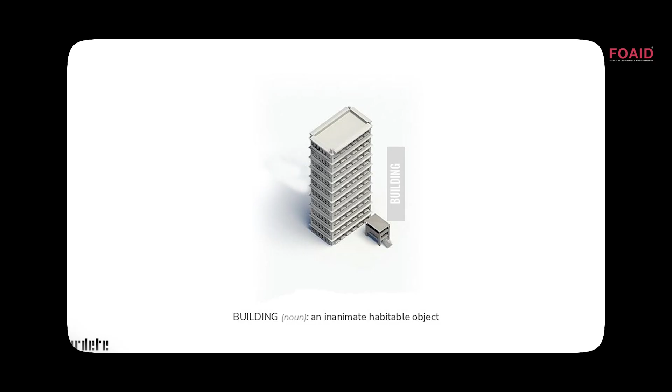So let's say we have a building. Does this building exist like an inanimate, singular object in space? No. We have something we call a site, a two-dimensional space which the building sits onto. But are these the only two that interact with each other?

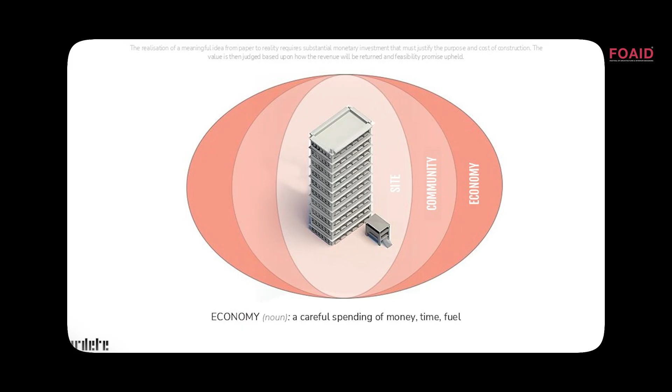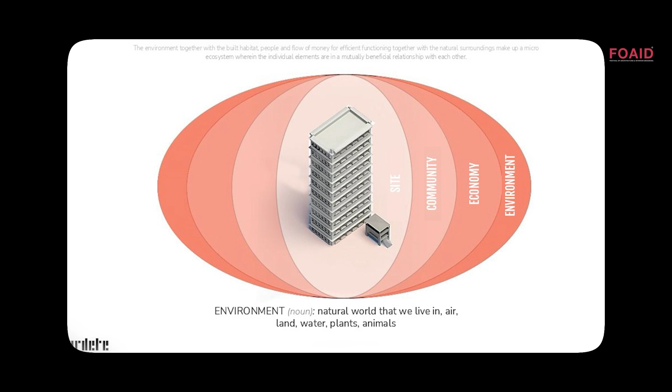We have a community to respond to, because at the end of the day, it's the community that we are building for. And is that the only parameter? It also has to do with economy, because different economies require us to be careful and mindful of what we're supposed to be doing. And then we have environment. So if you look at it, layers keep adding, things keep changing, and many parameters keep coming into it.

And when we say where the confluence actually exists, it exists somewhere in between these spaces - somewhere we have to take care of site, community, building, economy, and environment.

That's something in between. So as a young practice, we started looking at things where we had more challenges in terms of how to address specific problems that probably aren't taught in an architectural text. When we look at it from a perspective of solving problems we haven't thought of before - because when you're doing it from a college level, it's a very different perspective. But real life problems and real life solutions are very different from what we learned in college.

So we call our practice 'Streetsmart Architecture.' What it actually means is that when you're street smart, you have very limited resources and limited time, but you still have to crack the code - something that is very appealing, very fast, and available for everyone. That's what we call street smart architecture.

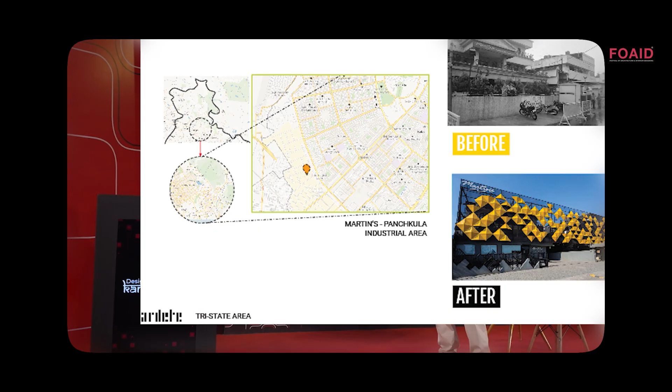When we look at this first project, the top one shows before and after. We built this project about 10 to 12 years ago. It's a pretty old project, but because it was about facades, I thought I would include it. The idea was that this project had two different old industrial buildings, and there was something that needed to be addressed.

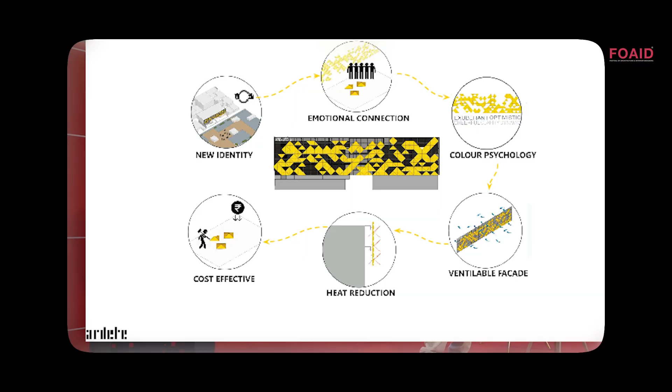So when we were doing it, the question was how do we take a disused industrial building and add a connection. In this particular case, the client asked us to do a screen predominantly in steel and glass, but that wasn't something we wanted to do. We wanted something more vibrant.

It was a north-facing facade, so it didn't hit the sun too hard, so we could be more liberal and flexible with it. So the whole thing turned into a ventilable facade.

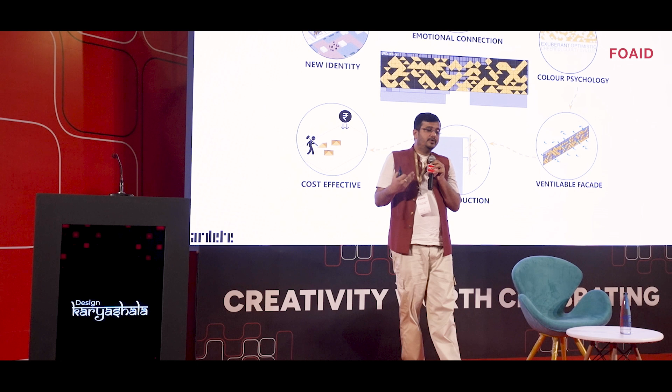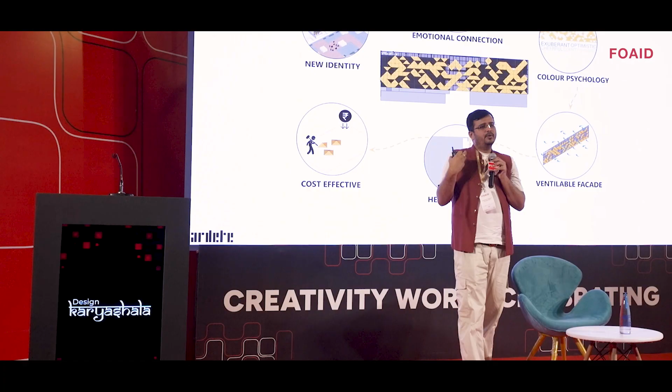Then we looked at how we could reduce the cost even further, so we talked about local methods of making this. We could literally make all the panels within the factory to cut costs instead of bringing them from elsewhere, using a skill that was available and that also connected emotionally to the people working in the factory. This is how it turned out, because it was a very mundane environment we were working in.

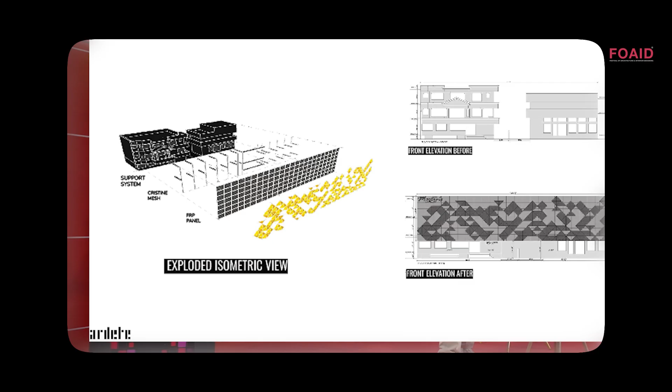So what we did was, it was an existing facade. We wrapped it up with a screen, and then we added these playful elements on top of it. This is how it was being constructed, how it was being made.

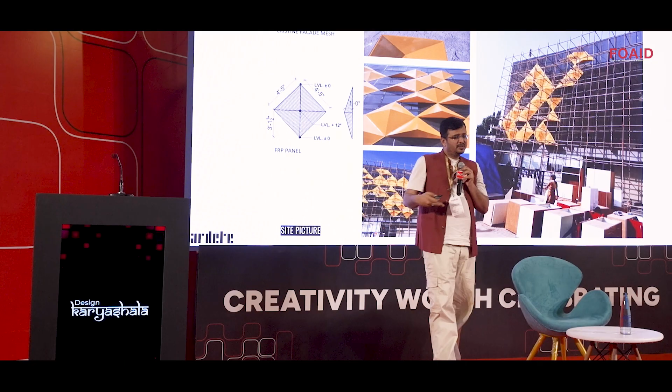There were studies because it was a large plaza, but it was a disused industrial park. So it has a lot of broken parts, a lot of workshops and everything. So it was something we call urban acupuncture, wherein you could have some amount of goodness at some part of it, and it should slowly have a contagious effect to reach other parts. This is how it has come out to be.

This is another project where we were experimenting. When we'd done a certain experiment, we moved on to this one, where we had a similar challenge - very tight spaces where it was already laid out, and we could add something where the client actually said, I want something which would really stand out, show something very promising, and also something that can be timeless.

So when we look at it, we talk about a building where the norms are so stringent that the building volume itself is a zoned area where you can't actually build anything outside it. There's a saying that when densification happens, gardens become terraces, terraces become balconies, and balconies become windows.

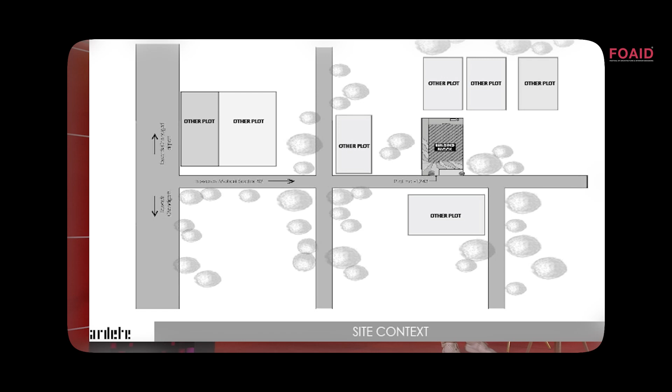Similarly for commercial areas where we talk about forms, massings and elements, end of the day when there's high densification and high real estate cost, it actually comes down to areas where there could be pocketed facades that could still feel like a terrace, and that's how this idea came about for this particular plot.

So here we created a very narrow balcony on a west facade, so we had to reject a lot of west heat. This was in a new area, so we were exploring that, because Chandigarh has been very characteristic of how concrete has been used in innovative ways in its time. So taking inspiration from what Corbusier did with concrete, we tried testing new limits.

We tried to look at thin concrete structures less than 3 inches, with a single reinforcement structure. When we talk about thin concrete structures, it's actually pretty tricky because it needs support and rest, and we're talking about earthquake zone 4. So it is pretty critical.

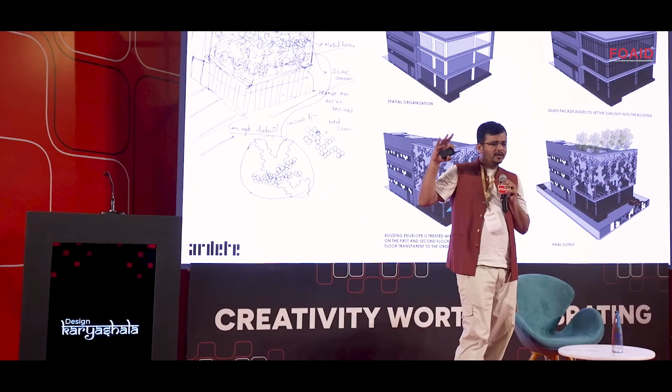So here the interweaving of these particular elements actually holds up the concrete structure as well. The initial idea on the left was something like a cheese tray, or like a honeycomb, where it can gently open up where we wanted and should not open up where we didn't want it. So it was a very subtle, blended movement into it, and then we have a lot of greenery on top.

This is how the construction was made. The interesting part was because we were using standard tools and implements, no specific molds, so it was very difficult for us to even see the facade before it was fully built. We had to wait for different times to see how the pour of concrete was, how it was particularly coming out.

So it was good fun, where we finally ended up doing something pretty meaningful, and this was pretty popular when it was finished - even an institute like IAAC did research on it, on how it could have been made, whether it was AI generated, and this is how it has turned out.

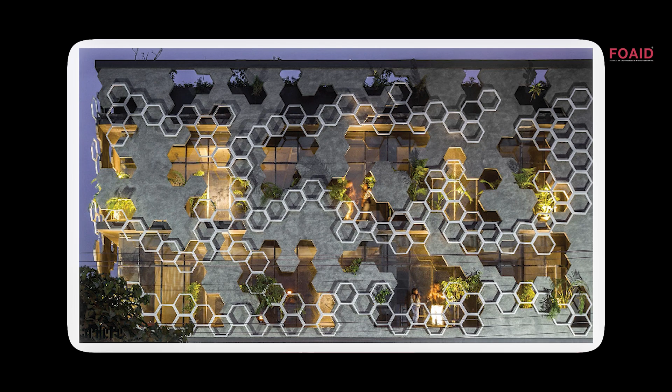In the pursuit of experimentation, once you get to a particular level, you just want to push the boundary even further. So when we did something which was a two-dimensional slim concrete, we were thinking, okay, what could we do if we push the boundary a little further and try something more geometrical - this was for another project where we were experimenting with different kinds of box balconies.

For a building which could probably be a hotel. Most of the time commercial buildings have an intent, but we don't actually have an end user most of the time.

It's obviously used many times for the end user to come in and use it as a space. So the idea was to have these balconies which are skewed, and because we don't have a very big open space in the front, you almost get to see it from the side.

The interesting part is when you see it, it looks like boxes coming out which are gravity-defying structures. In reality it was not, but it gives that sense of illusion. This was also because on the southwest facade we had to cut a lot of heat from the south and west directions, so that was how we managed it.

When we had to do something like this, because it was complicated on a project of a certain scale, we had to look at modularity, where one module was turned around to become another module, and then turned around to become another module, so we could reduce the cost of the shuttering needed the first time.

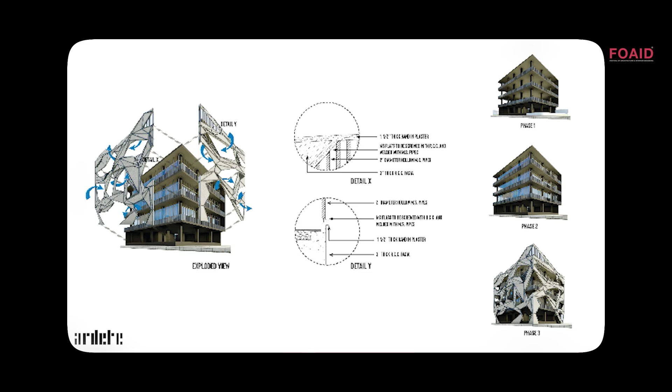This is another project where we tried to explore a possibility, because when people started looking at those buildings, everybody wanted us to do something similar for them, but without cutting into the area's efficiency. So we were also looking at what possibilities we could explore.

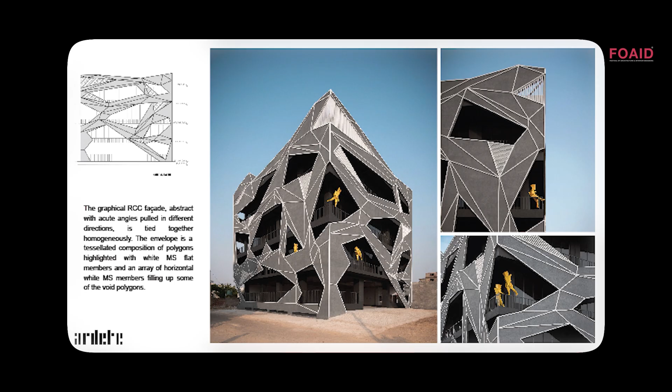Here the idea was to experiment with triangulated geometries, where we could open it out in a similar way to what we were doing before. This was for another client where originally this design was done as a three-dimensional object, but it wasn't viable for that particular project, so we had to find a new way.

The client said, I really bought into the design, but can you make it workable? So the idea was to create a sense of something illusionary, like tessellated, but in reality it's like a flat piece.

We gave it as a covered open-air theatre. The advantage of a covered open-air theatre is that, since schools are day facilities, most of the time it works like 80% as an auditorium for many reasons, and it adds only a fraction of the cost.

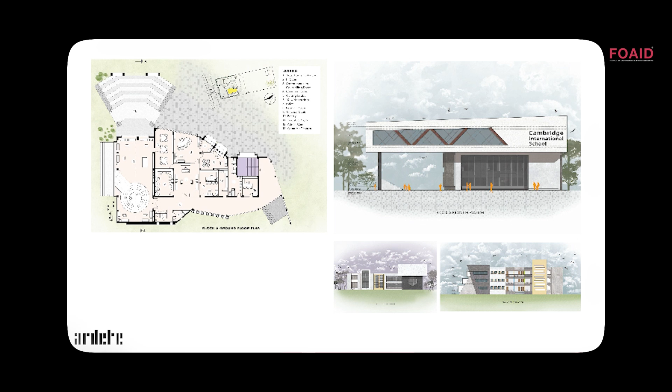So this is how this entire thing was envisioned and how we were building it. And here also we were pushing the same boundaries onto a much larger scale building, where we could see, okay, can we push our boundaries further?

This is when we started looking into curves, to see if we could look at something more in terms of facades and make it more sculptural using curves. This was for a school building where we were allowed to do curves, and they really liked the facade and everything.

But the original design was pretty complicated. It was a double-bent curve structure, and double-bent curve structures are only possible with concrete and a high amount of specific shuttering that needs to be done. So we later simplified it because they still wanted that feel.

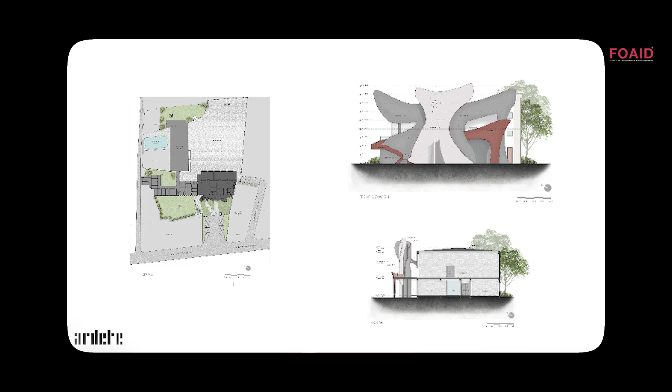So here, if you see, we have carefully integrated column structure into the white element and the gray element, and used brickwork in most areas to realize something like this, which on the face of it looks like it has been done in reinforced concrete, but actually 80% has been done in brickwork, and only supporting members have been done otherwise.

This is again what we were talking about. We thought not just about having concrete, but let's put a step further and do exposed concrete. So this entire facade is exposed concrete, whereas earlier the concrete ones we've seen were predominantly done in a tone that looked like concrete, which was plastered and textured. In this case, we were looking at whether we could push our level further and explore facades with exposed concrete.

There were issues with thickness. We had to deal with edges because it was exposed; you can't plaster them. So there were a new set of challenges that had to be dealt with.

And here we used brick, and also the facade that goes up was more like an actual pattern, which is like a Voronoi kind of pattern, and it flows up all over and wraps into it. Even the interiors of it -- because this whole talk was about facades, so I focus on what's on the inside -- it's not just that they are facades, but they also have a character that goes inside and forms the whole character as one.

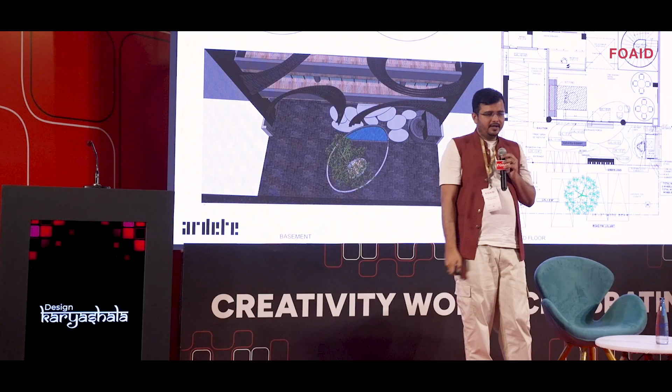Like more like how we can see here, it still looks like the scales of fishes, and how it blends even into the floor, and even on the inside, the curves actually go in and form the ceiling. So these were different trials we were looking at.

The left image actually shows that there was a point in time where we were looking at whether we could add more color into it, make it more dynamic. Because it's also about when you're doing bold facades, it has to do with what would be the reaction rate, what would happen if it doesn't go well, and what could be the chances of things going wrong.

So that's the reason you need to deliberate and see what colors would go into it. And end of the day, we have achieved platinum rating for this building. So it is not just about the facade, it's also about how the entire thing works as a building.

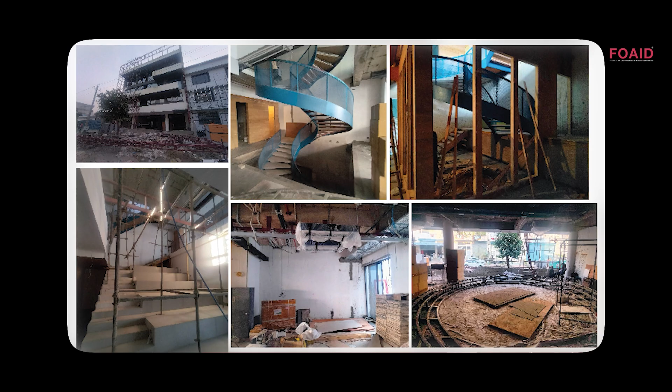So these were some of the pictures where it has been made, how this erection has been started, and how this entire thing has flown.

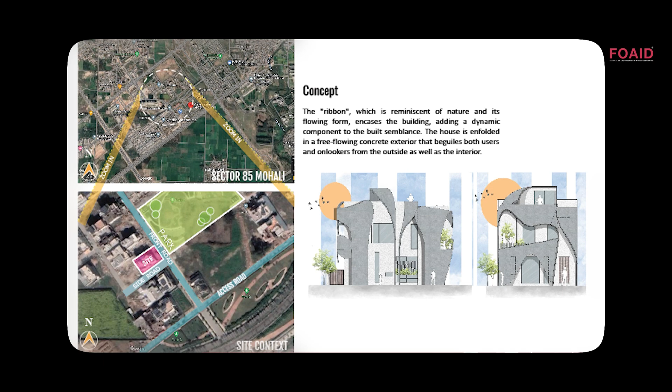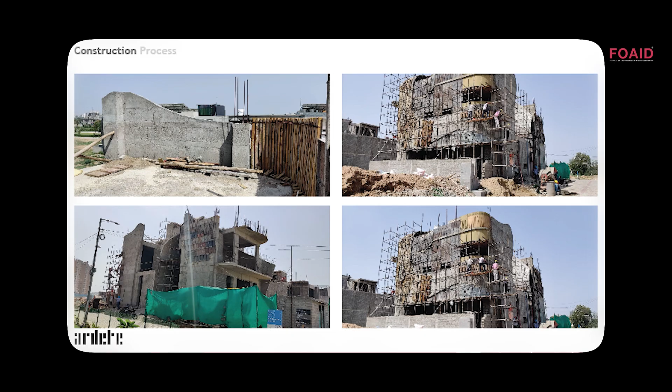And then we come to one project where we pushed our boundaries even further, where it was about double bent concrete structures, which we talked about earlier. The challenge was all of them are double bent concrete structures, all bend in a certain way. Though it was a sustainable building, we were looking at different methods of bending concrete to blend into it.

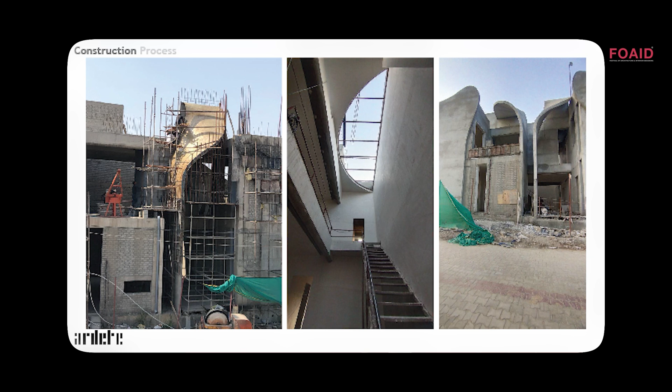It was a new kind of challenge where we had to always adjust, and many times it's difficult how you communicate it to the site, because when you have a line it's just about 2 dimensions, but when you have a curve it's about so many dimensions, and yet you don't get to the appropriateness of it. Each one was done step by step, and this curve blending was there.

Most of the time it's not about the drawing, it's also about how does it feel to look at it at that particular place, and what adjustments could be made. Because they were happening at a certain scale, it was even about what kind of curvature would be possible, what kind of elements would be there.

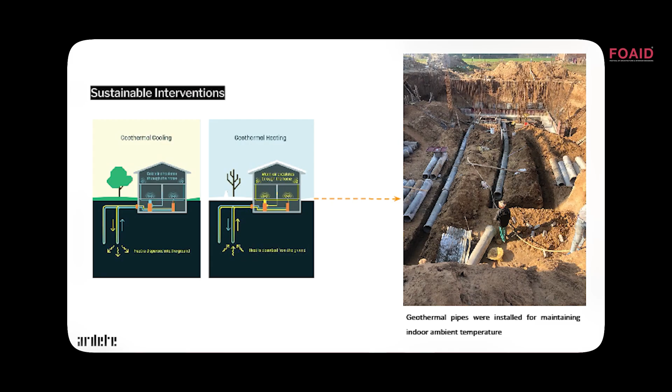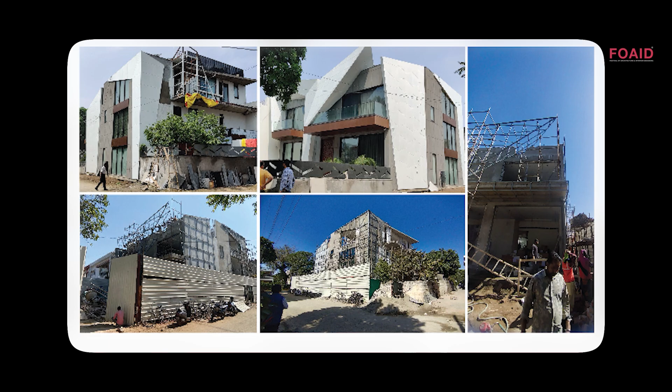And there were interventions where we had to do geothermal in this, and this is how this entire output has come in. These are some of the facades where we have explored different dimensions in terms of angularity.

This is a straight facade which is very clean, but at the same time gives you that sense of longingness that was possible.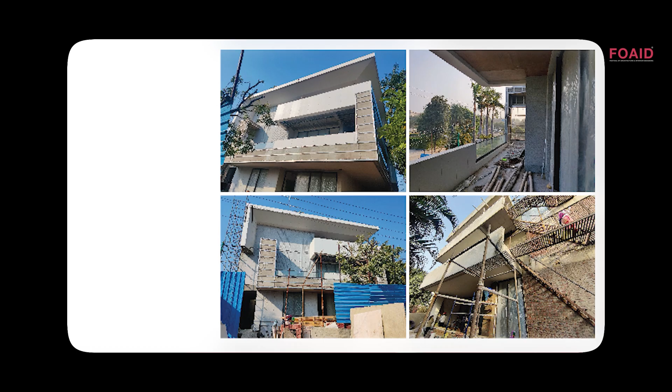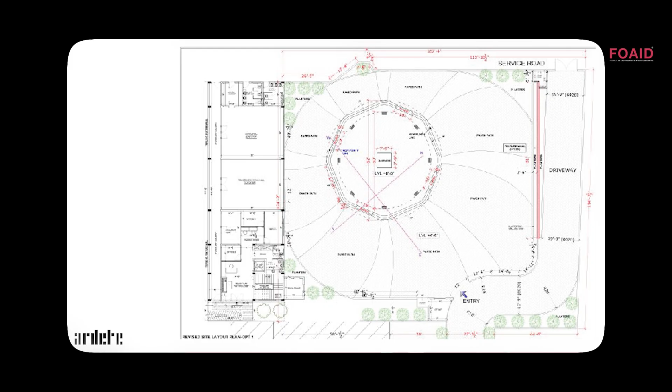So this is something that we are dealing with right now, where it's like a temple, like a samadhi, where it could be blended, and this is also a different scale. So this thing we are getting close to now.

The shell is up. We were going further, and this would be more like a different take on how petals actually unfold onto it, as if it's like a mother which gives you a kind of a hug. That was the kind of feeling that we would want it to generate.

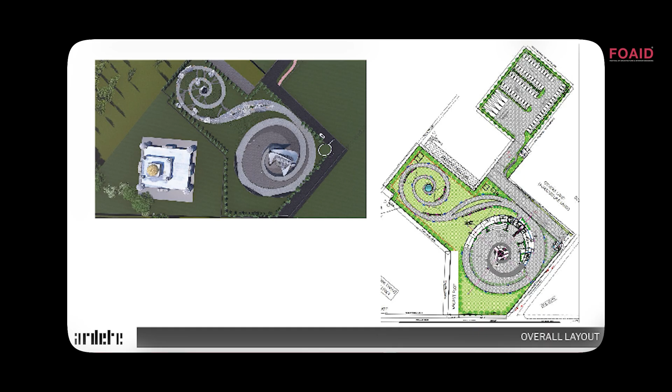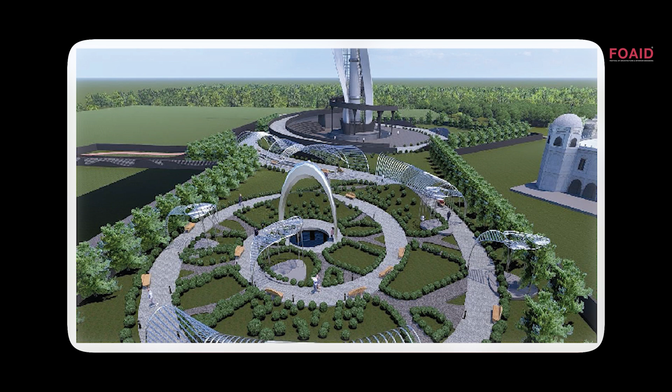And so you see how one project transitions into another, and each time you try to push the boundaries and pull. So in the end, it's more about, as students of architecture, wherever you start, you can keep pushing, working around.

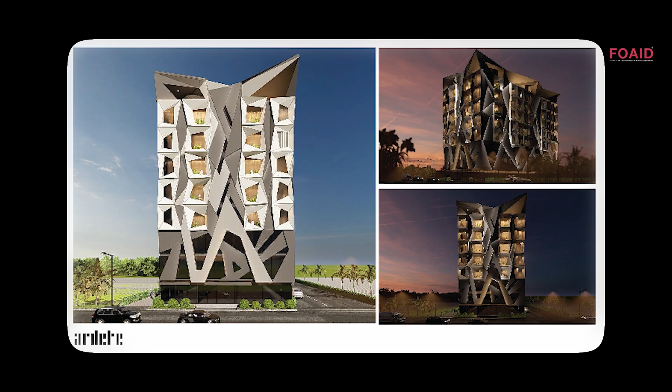Like one of our clients who has seen a previous project has asked us to do something similar in Dubai. So it's a different kind of project that we are working on right now. It keeps moving, and that's the whole journey of it, because this is how we have got here, and we still are exploring new methods and new ways where we could push our boundaries and see how much more excitement can be created.